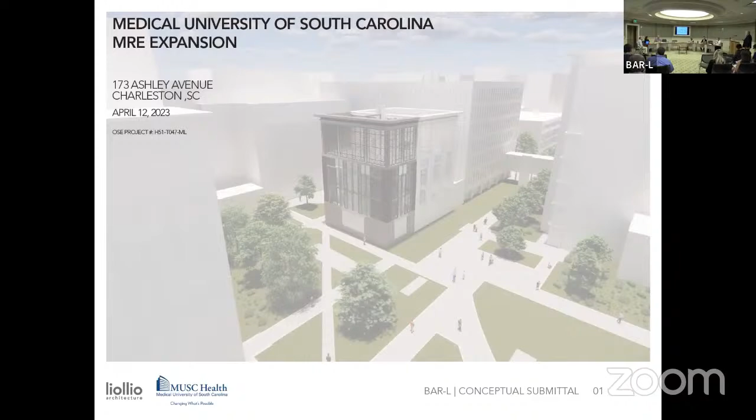It houses chillers that supply chilled water and steam for several buildings in this quadrant of campus, and it's being expanded to accommodate 2 new buildings, one of which we've already reviewed and approved at the conceptual level. The next one you'll see in just a moment.

I will move quickly through this. While I'm flipping through, I'll note that the building in question is here, this is Bee Street, this is President Street. The College of Health Professions building that was recently approved is right here; the next agenda item is this thing.

It is not actually a black building. Talking about this little wood frame piece right here on the model, tucked back into the core of the block, this site is part of the original footprint of the Porter Military Academy. We always include these same boards and timelines to give some sense of the history of the site, because we feel that's never not important.

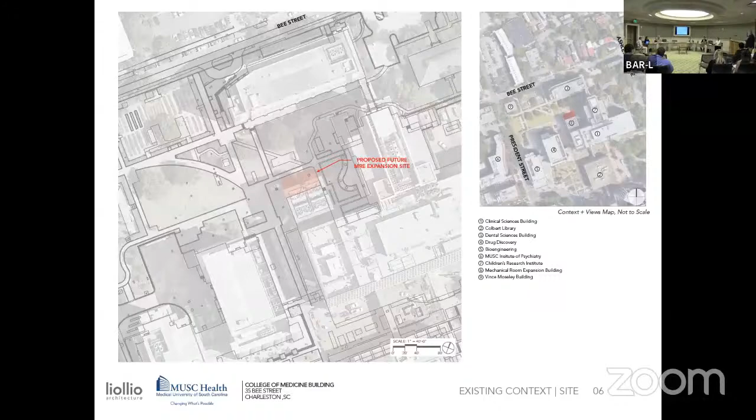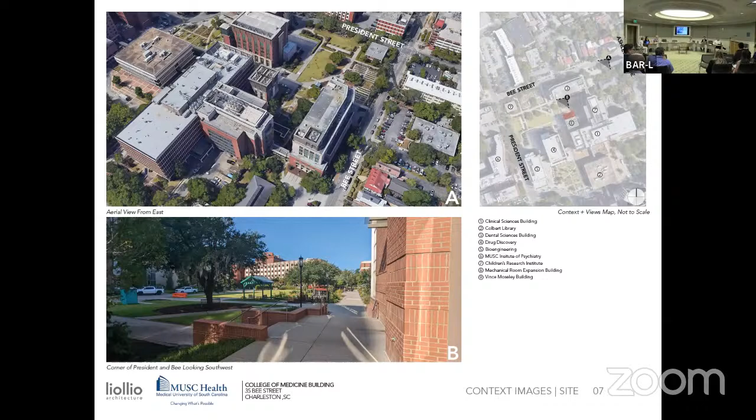This building right now is sitting in the middle of 20th and 21st century redevelopment of the block to suit the needs of the Medical University campus. See the building tucked in right here. At present, it's already fully behind the dental sciences building on Bee Street here, and compositionally, materially, it's a beautiful building.

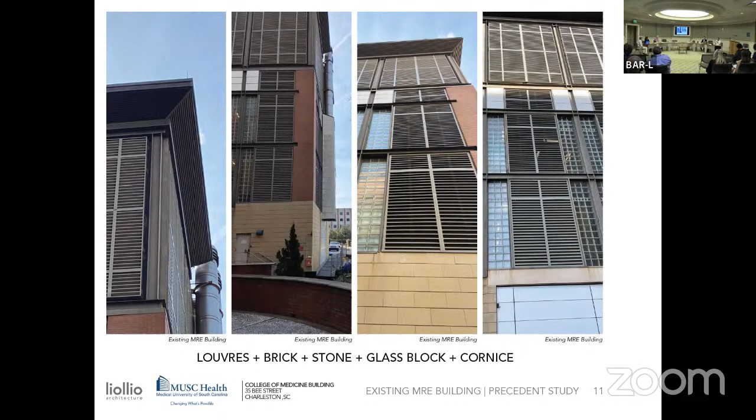I was very proud of it. The project architect who worked on it is actually now an MUSC employee, and he was very interested in what we're doing. And for good reason—the material palette, the facades, it works pragmatically, it works architecturally, and our intention is to simply expand that language.

We're dealing with a building that's not really historic by any measure, but it is valuable in our view. If you break down the materials and patterns, this is the composition you get, and we're just going to mirror that over and create one more bay. There'll be some form of architectural joint between the two, because we're actually building a new building.

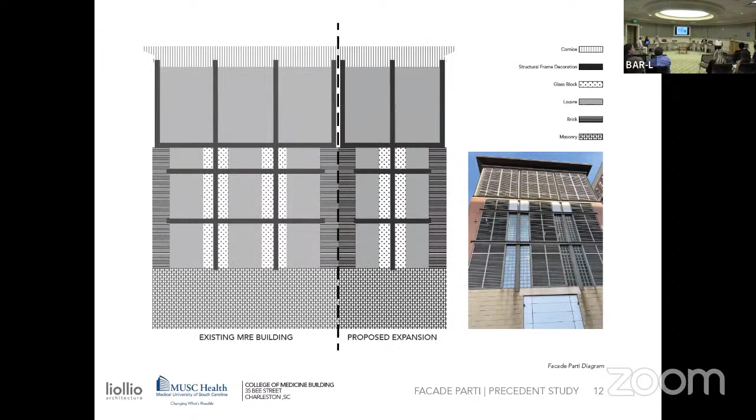We'll have to detail that. I'm sure there's a staff comment in that regard. We're extending its footprint by about 30.

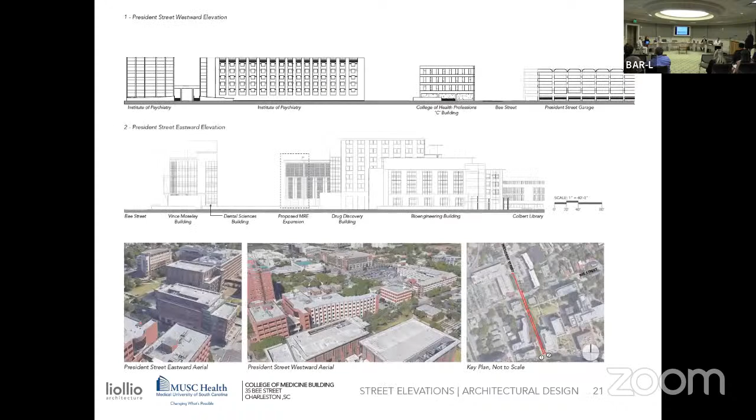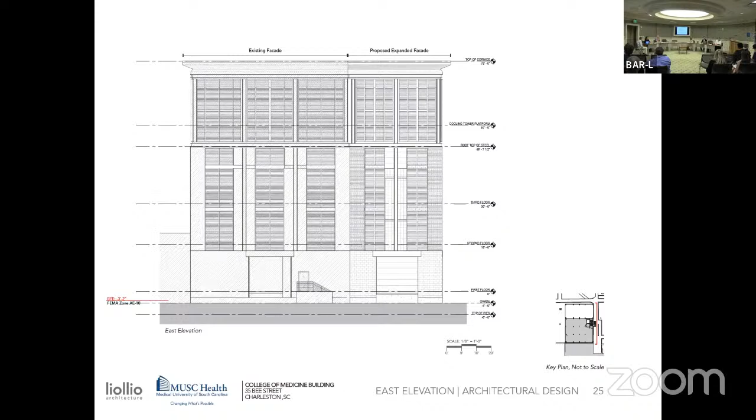Here you can see the existing on the left, the new on the right, in elevation. This is an expression of the material palette that's expected.

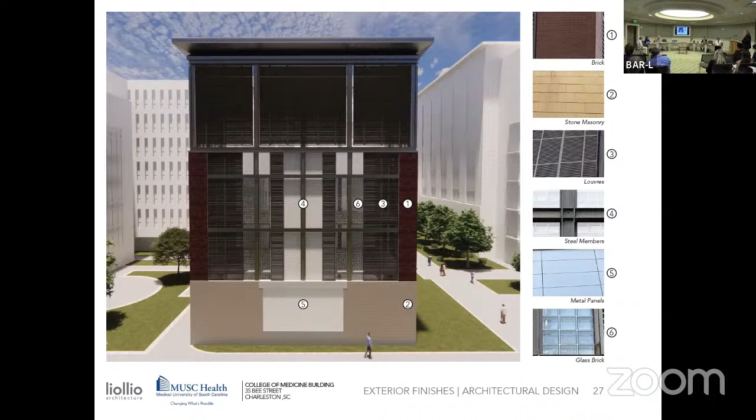We're going to have to fully clean the existing building. It's 20 years old, so it's got some fading and chalking, and we're probably going to match the colors as they exist today, not what was there when it was built, because otherwise it's going to get really mismatched.

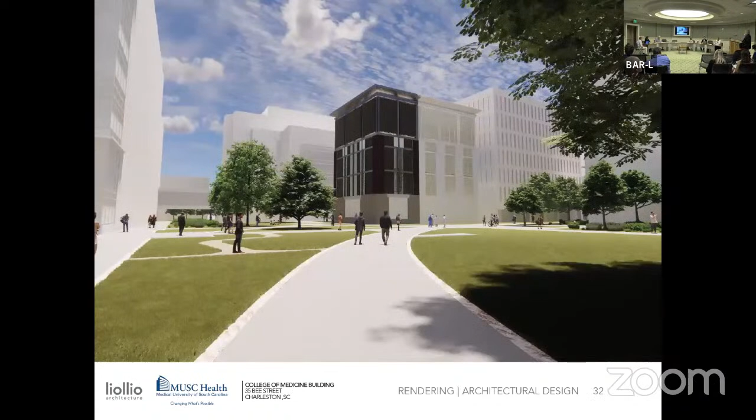And that's it, I'll answer any questions you have. Is there any question, Eddie?

So Jay, are all the materials you're proposing pretty much the same as what's there now? Just yeah.

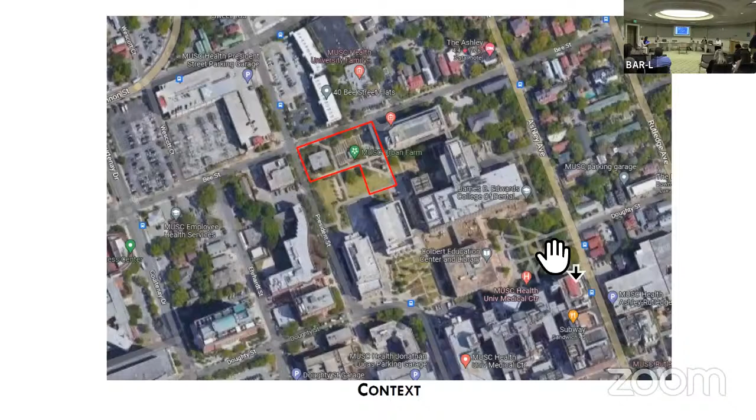It will include office and support spaces. And with context, this is in the same block up on Bee Street, with this one in the northwest corner of that block. This is the actual location. This is the building that was approved for demolition 3 weeks ago, and this is the historic wall that will be part of the next application.

Great, thank you all. Jay White again with Liollio Architecture. I'll start by acknowledging that this is the first permanent home for MUSC's college. I've heard it said that y'all had a building before, but I don't believe it—this is the first one, at least within any living memory.

But in order to understand the importance of this building to the university, we have several people from the university here—they're not going to say a word. We've got David in charge, who's the chief facilities officer, Jennifer Knoll, who's the assistant dean and chief of staff for the college of medicine, and Jan Buffington, who we call the space czar—she's the director of academic space utilization at the college.

Also here, Will Skelton from SLAM Collaborative out of Atlanta. We've been working together as a big group, and Mason and Dan are here, Liollio and a bunch of folks we've been teaching this semester, along with Eddie. You've been teaching Eddie too, though? I can't teach Eddie.

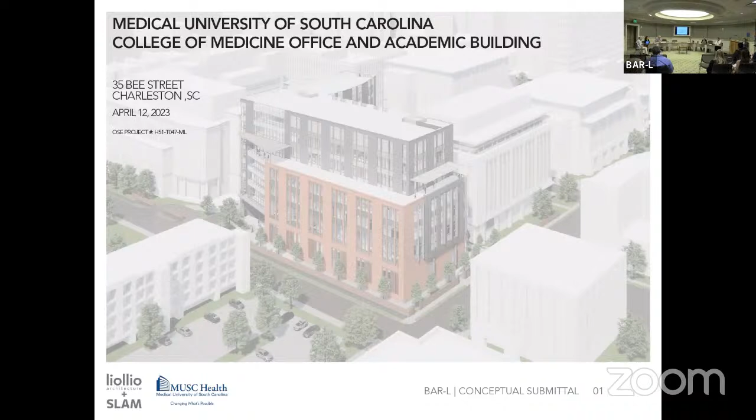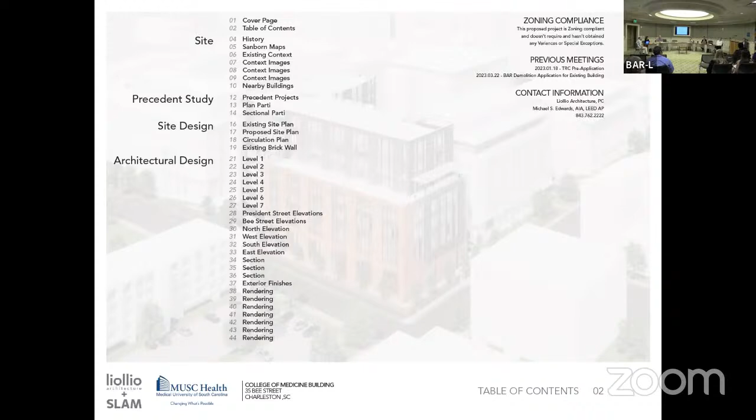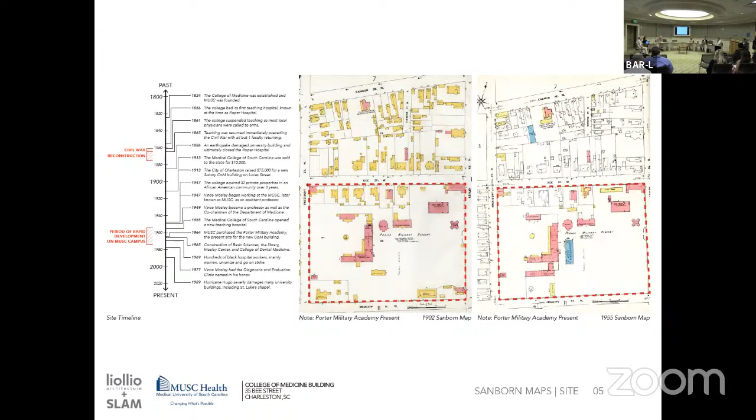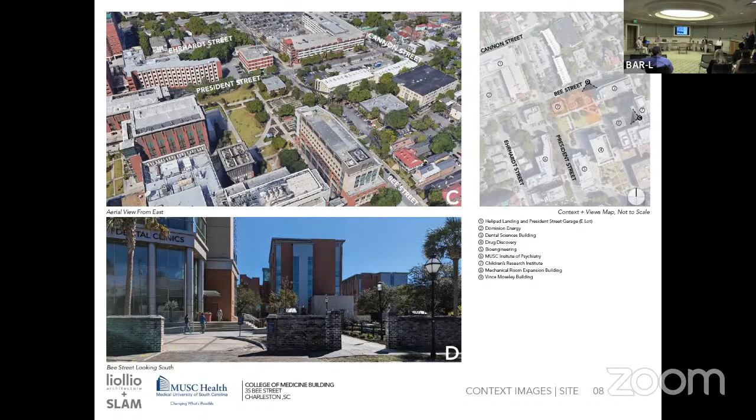You're all familiar with the campus, so I'll move through those other images. But in terms of precedents, there are two things we wanted to talk about. One is the College of Charleston Science Center, which we did about 20 years ago. We understand there's a special need to be conscientious when you're building the edge.

This is a very mixed portion of the city. There's a lot of scales, a lot of diffusion to the urban grid, and we're dealing with that. There's also a desire to express the importance of the program that happens here, like we did at Bassett Hall. And in a modern academic setting, there's an expression of making it inviting, active, and daylit, which you'll see in the design. Then there's embedding it within a natural setting, like SLAM did at a little school in Texas.

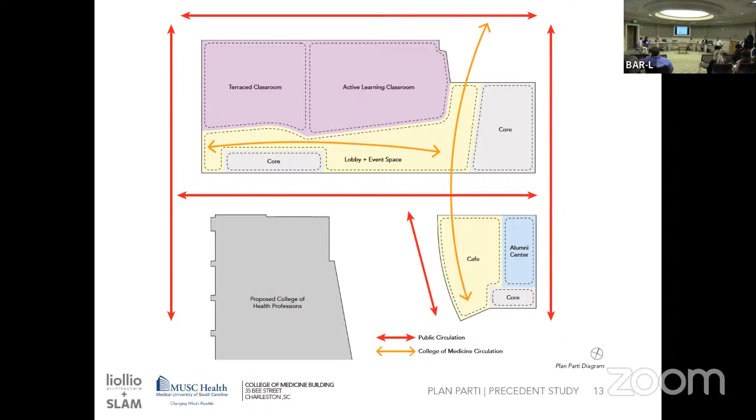This is the program on the first floor. Most of this building is an even mix between academic spaces at all scales and office spaces, which made it really challenging over the months we've worked on it to compose facades that suit all of those local programs. These red arrows relate to the site, but this section is diagrammatic and is intended to show how all these different uses stack up, because it makes a difference to the architecture.

The first two floors of this building have very tall floor heights, which is important to note. First floor to second floor is 24 feet floor-to-floor, because the large spaces on the first floor need that ceiling height for volume and for appropriate sightlines within the academic setting. The second floor is another 20 feet, then we settle into something more typical as we get into smaller educational spaces and the workplace. All the mechanical equipment is located on the seventh floor, within a mechanical zone occupying about half of that floor.

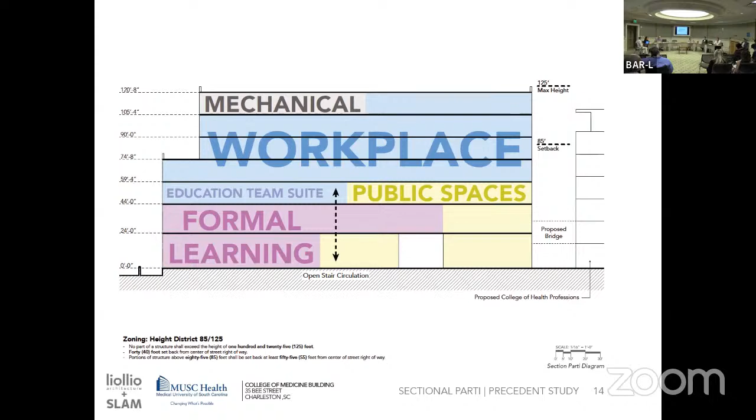Getting into the site plan a little bit: orientation across the top of the screen is Bee Street, and down the left-hand margin is President Street. We have the Vince Moseley building, not long for this world, the urban farm here, the future site of the College of Health Professions here, and then these three trees, which are notable within the landscape of the urban farm.

Since MUSC considers itself labeled as the Arboretum, we're going to spade out these trees and relocate them. The new 28-inch oak moves to the front entry, the 25-inch oak moves to this corner, and there's a 24.5-inch oak right there.

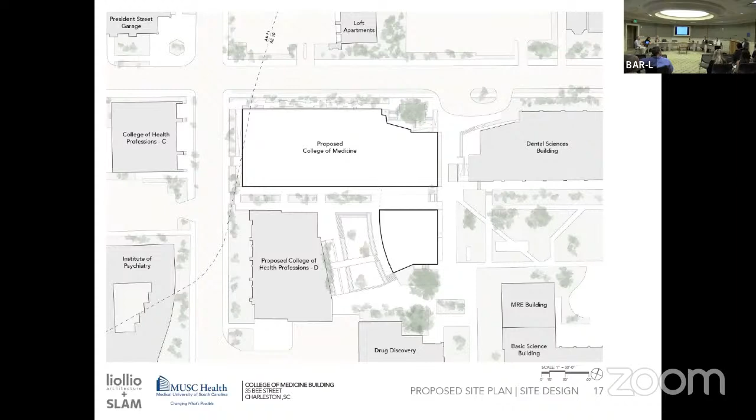This is the footprint of the proposed College of Medicine. This represents a breezeway at the ground level. There's a tangle of underground utilities on this site, but that's not really what dominated the site planning concept. We really wanted to focus on proper engagement of the streets and the appropriate creation of the courtyard between our building and the adjacent one.

One of the most successful attributes of the site plan is that it preserves and enhances all the pedestrian circulation paths that exist within the site today. There's a strong flow of pedestrians from the President Street Garage down diagonally and then southward through this mall. There's a strong east-west flow preserved and even enhanced. More pragmatically, there are fire lanes that have to be developed here and here, which have an impact on the architecture of large high-rise buildings.

See, the trees have been relocated.

Another thing worth pointing out is that we're dealing with a lot of issues with topography and flood. This is not a flat site; it actually has quite a lot of topography. Our buildings are sitting at a design flood elevation of about 15, whereas the rest of the site is around 10. That means our design flood, our first floor elevation for this building, and consequently for this one too, is right about the top of that wall, that historic wall that was originally part of Porter Military Academy.

So we're having to deal with how to enhance the space between the building and the wall, which brings in the whole site, and then also what to do with the wall itself. I'll show you another drawing in a minute.

We're making modifications to widen the wall to accommodate fire trucks here, create new entrances for handicapped access here, create new entrances for a stairway here, but then also using the surplus bricks to repair the wall and close in some of the openings that are no longer necessary.

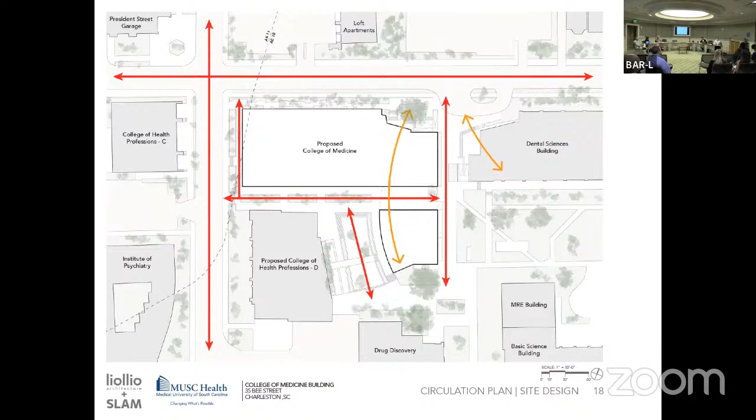As you can see here, this is the existing B Street facade. We're removing masonry here and here for that fire truck access. We're putting it back here and here, where Vince Moseley had poked holes that are no longer needed. Then on President Street, creating new entrances here, here, and here, with pilasters at a lot of the new entrances. That's because this is only a double wythe wall and it really needs to anchor any openings.

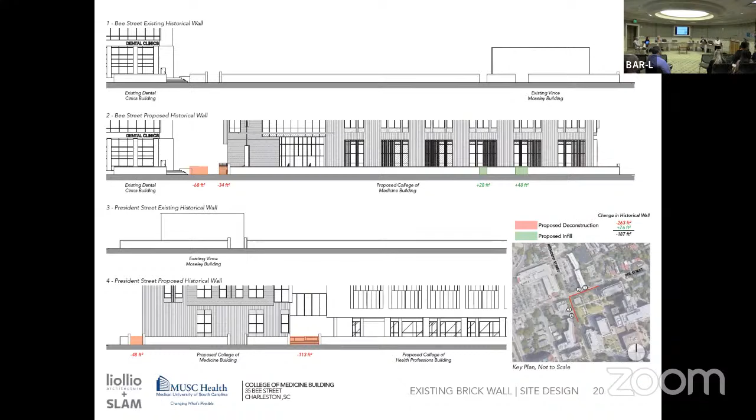Here, we'll let Ali take over and talk about the building.

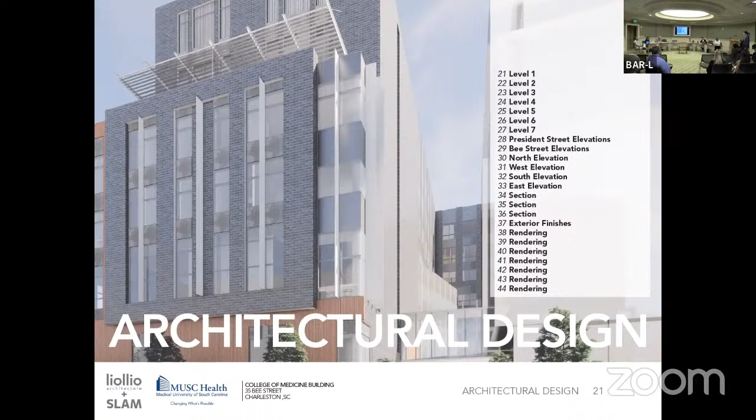I'm Will Stelton with SLAM. We're pleased to be working with Jay and Michael and the rest of the building team on this prestigious job for the College of Medicine. We're going to walk you through the architectural design. Feel free to stop me at any time.

As Jay mentioned, on the first floor there are some very large scale, large format active learning spaces. Specifically this space you see upper center, but also a tiered TBL, team-based learning lecture hall, which will step down. One of the things we're really excited about is the cafe space, which will be out here and will be a shared amenity among all the buildings in the area, and health professions are excited about sharing in that as well. And then the main diagonal that sweeps through the building, the circulation you see in yellow there, really starts to collect and sort of celebrate what is a more ceremonial entrance at the northeast corner.

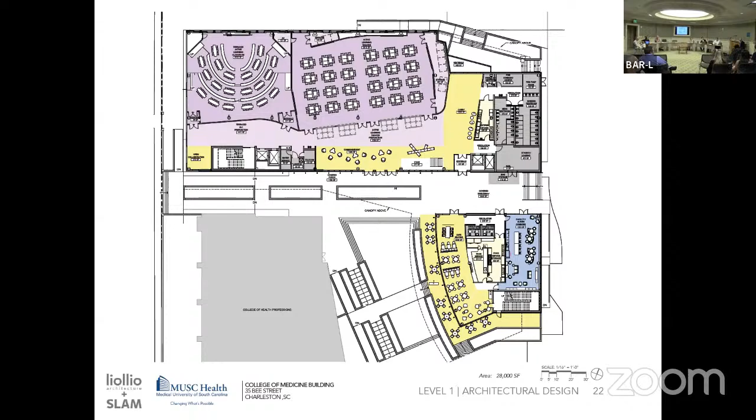But there really are a lot of different ways folks will approach this building, and we're trying to allow that to happen with multiple entry points from different directions, welcoming them into the building.

Quickly through the floor plans: the second floor is more active learning space, one major space here with an upper partition that will allow that space to have some flexibility. An open stair for three floors will start to allow the public deeper up into the building.

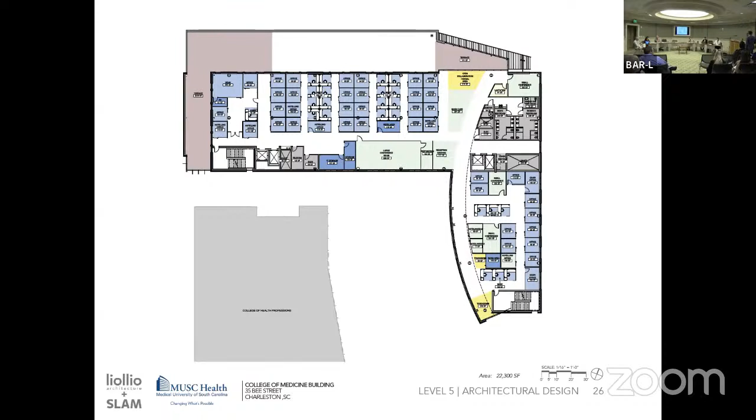And then you start to see there are more specialized spaces for the College of Medicine as we work our way up. More student focus on the third floor, and then more faculty focus on floors above, with the dean on level 5 and the rest of the administration, and then more offices on 6 and 7. The floor plates are a little bit smaller as they step back, and then there's a mechanical penthouse on 7.

Here you start to see some of the context, but also the elevation along President Street, which I think is really important as you start to see how bioengineering, College of Health Professions, and College of Medicine work together. We started to repeat some of the materiality and definitely some of the fenestration of those buildings to create some cohesion along the street.

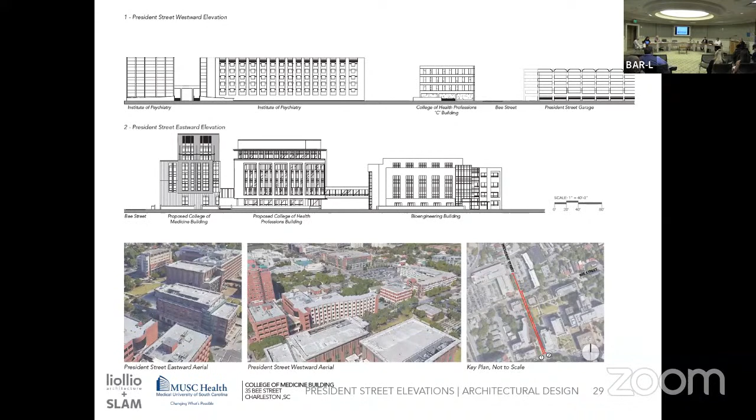But the college was also interested in making a bit of a statement and anchoring the corner of campus. So there's a little bit more of a sense of verticality at the end there that can really mark that corner as something special for the college.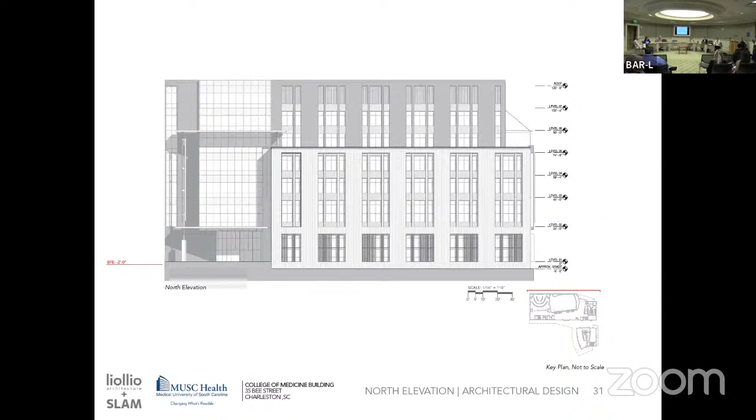You start to see the north elevation, and along Bee Street you see the verticality of those openings. This is that ceremonial entrance we talked about, which shares some commonalities with the dental building next door. You'll see that a lot more in three dimensions, and you can see it on the model as well, see which way the model is oriented.

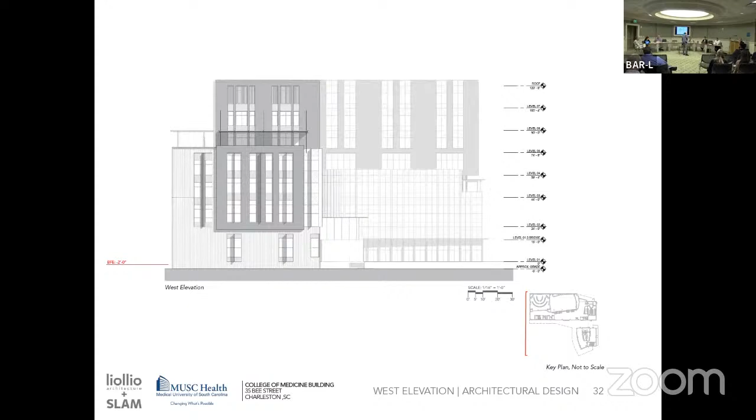You can see with this chamfered corner that dental has, that's been repeated in a way on our building. What we're trying to do there is create a gateway. We know that term is overused, but in this case it really makes sense for the university, with a main circulation path that ties to the main quad. There's also an idea that the university may want to do something with this property across the street eventually, and this would allow that to happen.

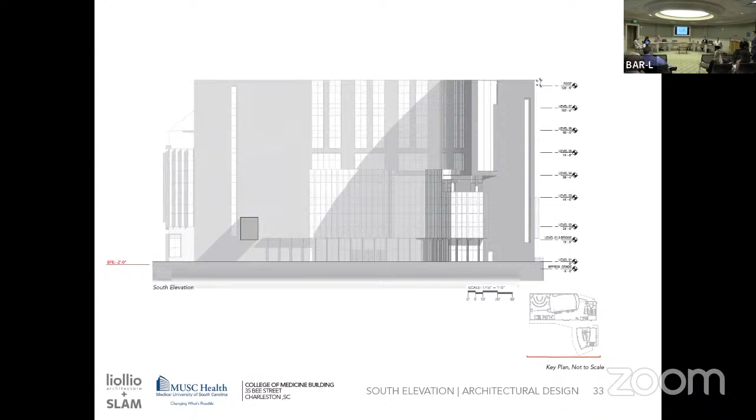As the building moves toward the inside of the courtyard, it opens up more and has a good bit more glass. This is that cafe we mentioned and some of the student spaces, looking out onto that shared courtyard with health professions. Not only looking out but looking in, we think it will be quite an active and spectacular space.

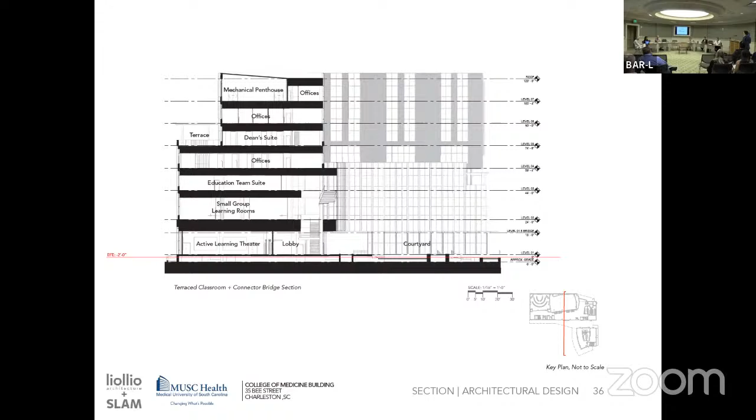Another version of the section to work up through the building. Cross section with the courtyard shown to the right beyond. Quite a few sections in there.

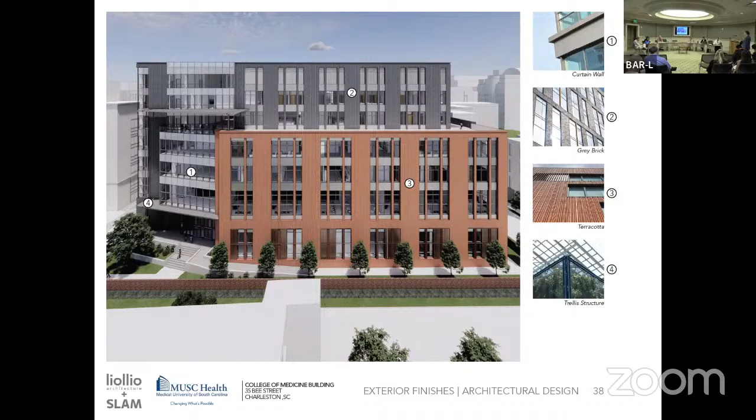Here you see the main corner, the northwest corner. President Street is here. This is the future health professions building, not built yet - the university doesn't own this. This is student housing and parking over here. That's why we felt like orienting our entrance here, with the common shared space and entry downhill, made a lot of sense.

You can see that the building does step back as it works its way up. We've got quite a few canopies and sunshades on the dean's level especially. The administration was really interested in having some space where they could gather outside, so you'll see several of those. We're also still working on the design of what the main canopy wants to be at this location. Jay mentioned our floor height - we need to get up about 5 feet from grade up to our entry, so we're working hard with our landscape architects to design that in a way that's very elegant and allows folks who are disabled to proceed up in a similar way.

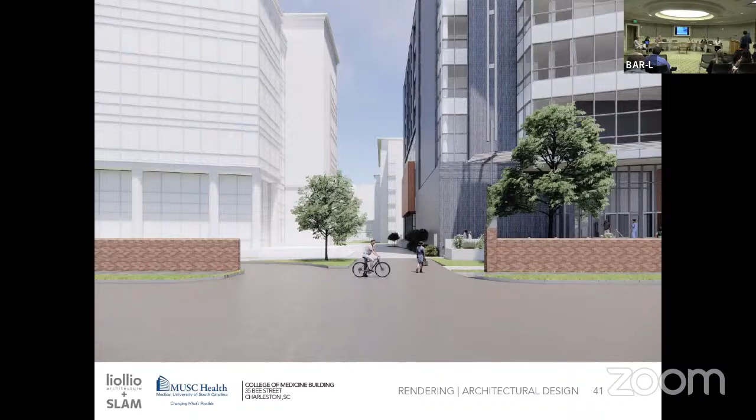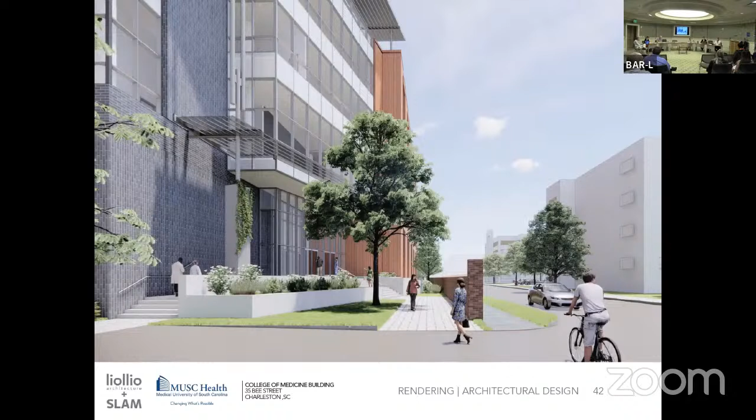This is a view down the corridor between the two buildings, looking south back to campus. This is where we're saving as much of this brick wall as we can, coming to this point, working on how to create that entry and get folks up both ramps and stairs to the main entry - that's what we're calling our ceremonial entry.

We felt like this was quite an important corner to solve as well. The health professions building, on the right, is vertically oriented - at least in their last go around they had some vertical sunshades, you can check in with them to see if that's still happening. We felt like having the vertical sunshades on our piece helped accentuate that verticality we talked about earlier. Because their building steps back a bit due to some electrical underground, we felt this corner was quite prominent and important, so we made it more like a lantern element that would light up nicely at night.

This is literally the Dean's Terrace up on the 5th floor, starting to accentuate that with both the brick and the canopy.

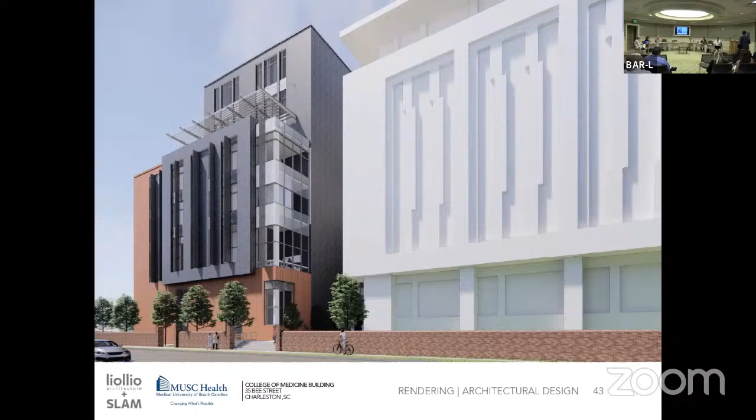This is between the two buildings, so we've got a pretty narrow passage through there and a bridge that connects the two buildings. We've spent a lot of time making sure folks are welcome coming in on grade, with a gentle slope up and turning the corner, with some targeted openings in the brick wall so people can get in from multiple directions. Once you make your way through there and underneath the connecting bridge, you kind of hit the oasis point between the buildings.

It will be a very urban condition. These buildings are 125 feet tall, and so for that reason we've started to step the building down in massing, not only on the exterior but on the interior, so that it feels a little more pedestrian friendly for the folks in this courtyard. This is the dining cafe space that spills out here as well as onto a covered connection that explores the eastern part of town.

Is there any public comment? All right, go ahead, there are staff comments.

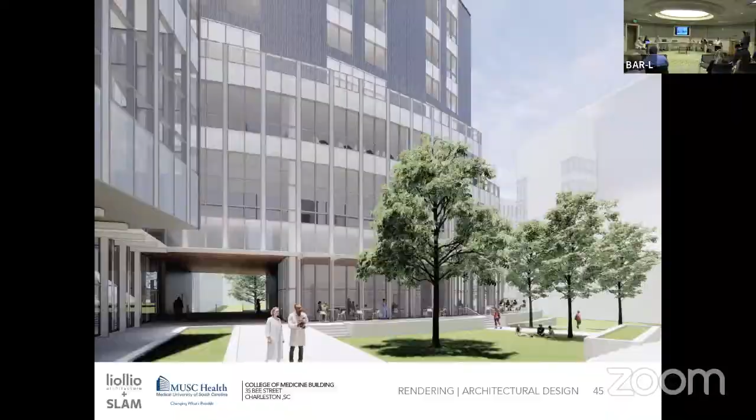Just a few notes, which I think have actually been emphasized in your presentation, but since it's a new project and a big project, I always like to have a few notes. First, the proposed is comparable to the neighboring dental school in height and mass. The proposed successfully blends the languages of the dental school and the new to-be-built College of Health Professions building on President Street, as well as the colors that have been part of the identity of the MUSC campus. A clear, easily identifiable entry gives hierarchy to the Bee Street facade and reflects, while not mimicking, its neighbor, positioned in such a way to properly serve as a gateway to campus. The facade openings give vertical proportions to the design as guided by the BAR principles.

The contemporary language of the building offers contrast to the historic masonry wall, allowing it to be showcased. Even so, alterations or disturbances to the wall shall be kept to a minimum as proposed. Applicant should describe how other non-original openings to the wall were handled - for example, does the pier design allude to original openings or to new openings? You did touch on that when talking about wall repairs.

Terracotta and brick are traditional materials; however, on this building they are placed and expressed in a very untraditional fashion. Because the building is clearly contemporary, staff is comfortable with their proposed use and orientation. It seeks to understand how these materials will wrap corners and edges and into openings. It's also important to understand the offset between wall planes and fenestration - for a building of this size, 8 inches seems like a minimum.

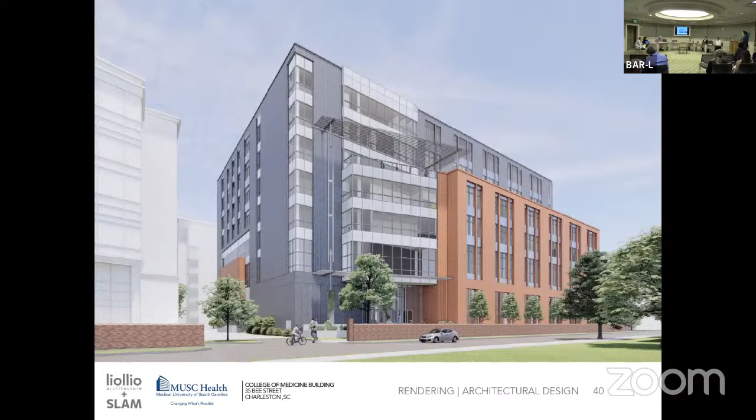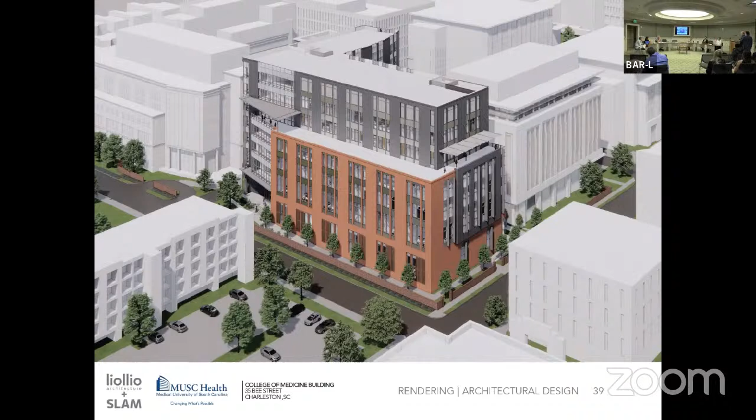Do we add the corner at the auditorium as well? Well, I don't know that I understood—can staff comment as well? Where was, I'm sorry, what was that? Yeah, I think it'd be worth studying. I think from the ground you'll feel much more of the relative position. Yeah, I agree. At the intersection—creating street intersections and hooking buildings, talking to each other, it's urbanistically important.

So part of our challenge is that corner we've been working hard on—this is where the terrace active learning theater is, the main one. We have projection screens or walls there, and they might not just be screens, they might be LED on a solid wall. We're trying not to put fake windows in. That's why we came up with this terracotta screen idea, letting natural light in where you can, since there are other means than glass.

So Annie and Linda, I'm allowing those to be covered under board comments. Okay, the motion is for conceptual approval of board and staff comments, including the additional height. Is there a second? Sadie, second. Eddie, how do you vote? Yea, in favor. Sadie, yea in favor. Luda? Yea in favor. Thank you.

Next one—is it made in house? Item number 5 is 35 and 37 Prioleau Street.

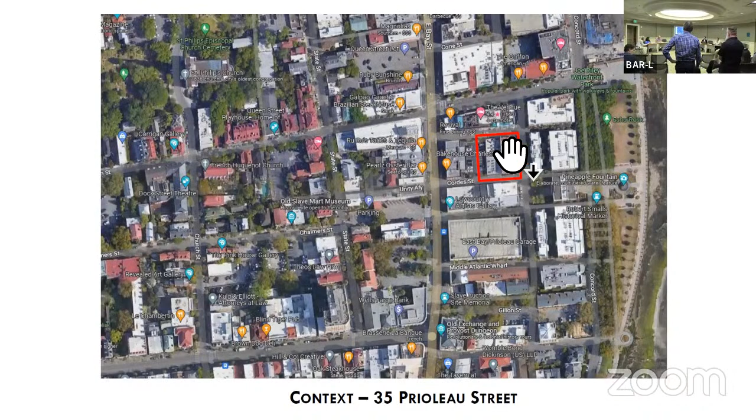The building in question is in the red box. It has 2 roofs, so you're seeing what looks like 2 parts of the building today. This is taken separately—fine, keep going. This is the 1-story structure at the back, on the south side. This is from the northeast corner. North elevation. West.

Okay, we're ready. Thank you, Chair. Good afternoon, I'm Jimmy Walker with Goodwin Mills and Cawood. And also we have here David Kreider with HPA, who is actually the applicant, an architect of record.

We've been working together on this building for quite some time, and fortunately we had a very good report on the history of this building, which when you look at the pictures, you can tell there's been a lot of different things going on with it over the years. I want to start with a bullet point overview from when the building began to where it is today, then David will go over the proposed design. This building—the front 3 floors—the whole building was a 3-story building in the beginning. The eastern side was a full 3-story building.

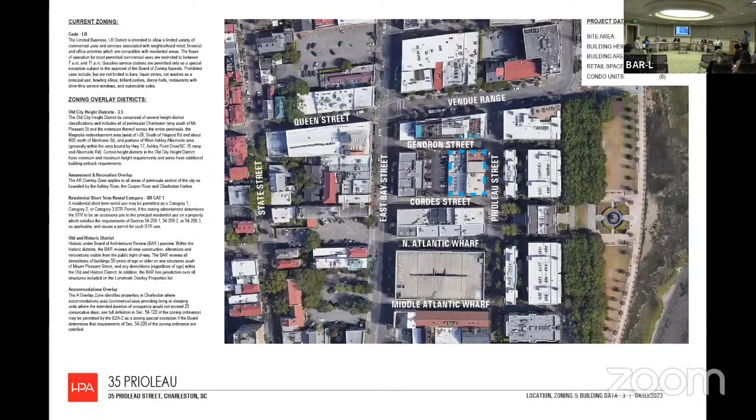It was constructed in 1820, and around 1833 the 1-story warehouse buildings were constructed on the west side of the property, along that parking lot between the buildings. In 1886, the great earthquake heavily damaged the building, as you can see top left. At that time it lost the walls on the south and east side—that's where the 3rd floor on the north side along Prioleau Street and the gable roof, half of the building, was lost and never built back. That's why you see the building in the condition it is now. The insurance maps all show that up until that point it was a 3-story building.

Also, apparently in 1952 there was a pretty big fire in the warehouse on the north side, the 1-story section. Notice half of that roof is sloped, half is flat—the flat portion was apparently destroyed by fire and replaced. In 1969, the rest of the original gable roof was removed; that was about the time the building was renovated into what was known as the Colony House. The north wall and third floor had to be reconstructed for structural reasons, so the roof came off and was never put back—that's when the full gable roof was lost. In 1994 the building, most of us know, became the Harbor Club, and the roof terrace structure was built around 2001. So that just shows the building's been through a lot of changes.

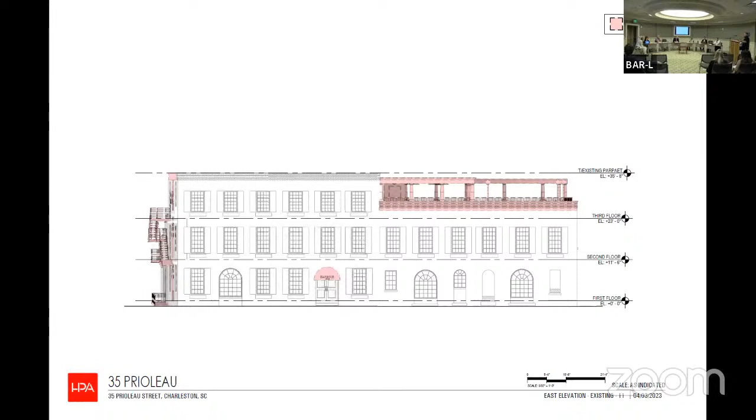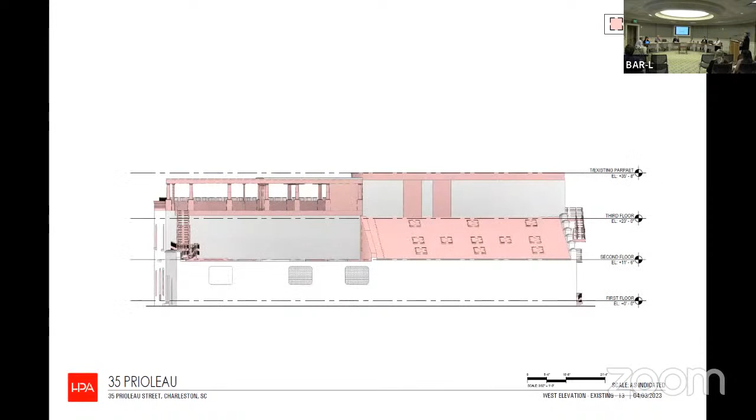This is the existing site plan. Going through the elevations quickly—essentially what you see in pink is what we'd like to remove from the building: the rebuilt terrace and the pergola, the canopy off the front entry, and the fire escape. We're going to put in some new windows, which you'll see in a minute, and the whole back half of that one-story addition is to come off as well.

So the plan is to turn this into first floor retail, and then upper floors condos, total of 8 condos on 3 floors. The gable form is what we took inspiration from, and we're proposing that a gable form would go back in its place—not a true reconstruction, but an adaptive reuse of the space.

We would like to also mimic that 3rd floor that you see in this portion here, back to what we assume or have worked out in our heads what it might have been like, or probably was like, before the earthquake.

And then we'd like to do an addition off the back that is inset from the existing 1-story construction, out of a material that is modern and differentiated from the existing masonry that you see there today.

You'll notice on this north facade, it's cleaned up. We're going to repair these, add a window at the corner because this top floor will be for condo usage. So to make a usable condo space, we need a window.

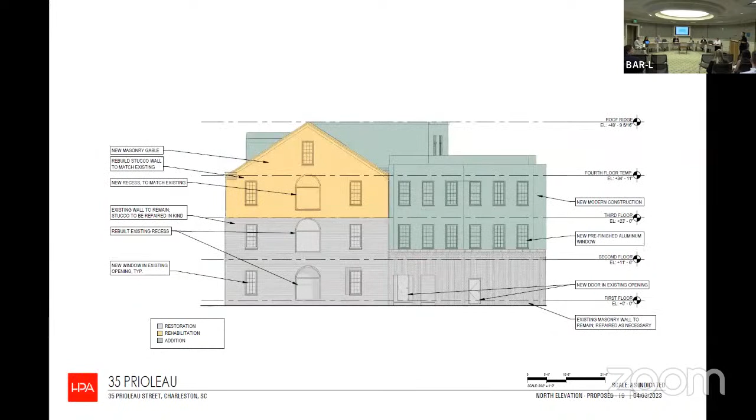The rear elevation is intended to be simple. We'll do some alignment of our new windows with the existing. We'll leave this back wall as it is, as we believe it was always that case. Again, modern materials on the back to differentiate from what you see that's there today.

And you'll notice that it will fit within the context, hopefully, of the space. Though it is larger, it was, as you saw in the historic photographs, a larger building to begin with.

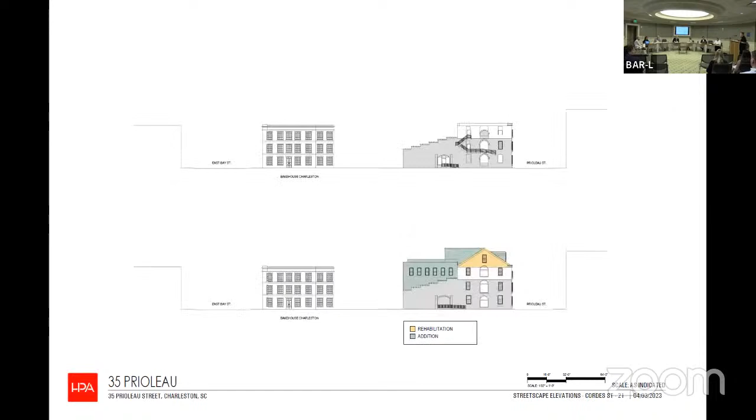That terrace, it hasn't been determined if it's just for the top condo folks or if it becomes an amenity for all the condos, but it will be a quiet terrace up on the top as an amenity to some of the residents.

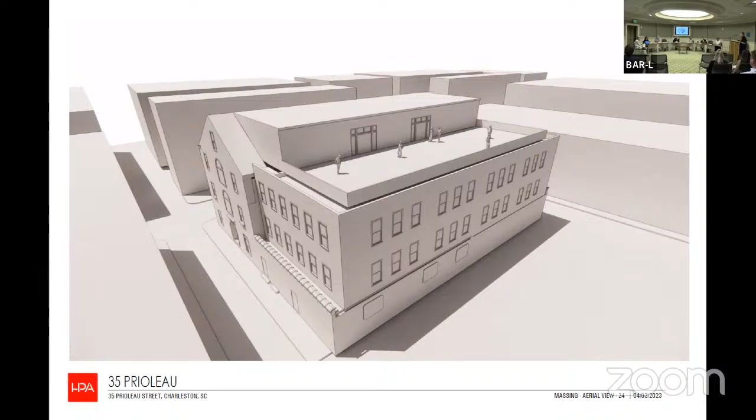Questions, comments?

So you don't know yet what those materials would be on the back? On the back, we haven't determined what the materials will be yet. We've been talking about a couple, but haven't settled on anything in particular.

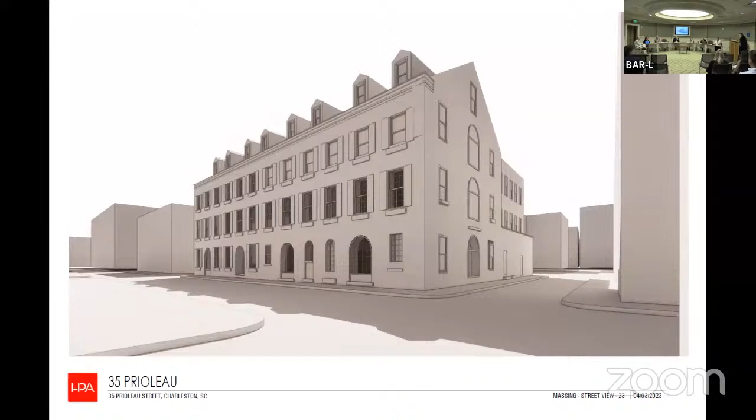So that entire—was that the west facade? We don't know what that material is. That's right. We've been mostly wrestling with form, and really that's presented here for discussion—the form of both this addition and the gable.

It will likely be unobtrusive visually. Well, that just affects the scale, so it's hard to know.

That's true. And then I was just curious, in the historic research, my guess is those windows aren't that old, but maybe they are. Do you know if that light count is what was original? Did the Preservation Society know that?

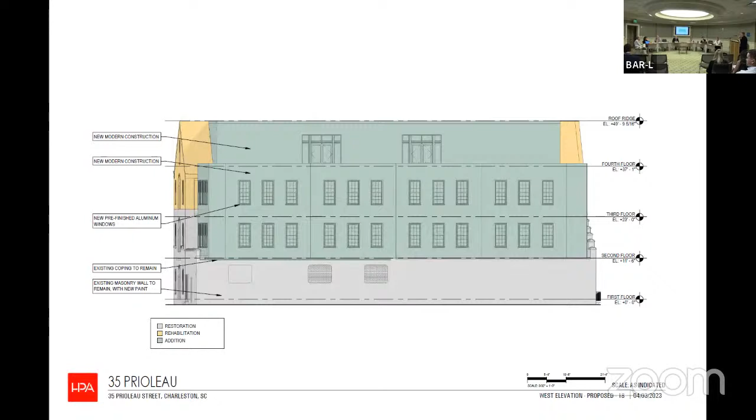Is it in the—are you talking about this addition or on the original? Just curious, because I'm assuming you're going to go back with new windows to match, since they're all in terrible shape. I was just wondering if they really were, whatever that is, 12 over 12. That seems odd.

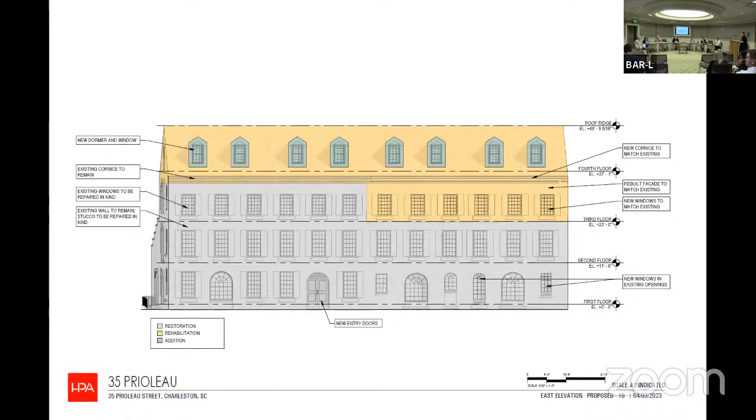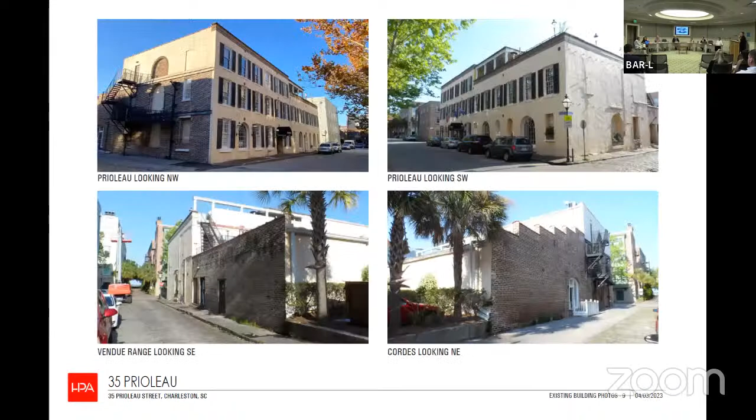There are historic photos for that—so there's a firewall that ran east-west that we found, and it appeared that the windows on the upper floors on the north side of that were of a different size than the ones on the south side, according to the research.

Any other questions? Is it time for public comment?

Preservation Society of Charleston—we appreciate the applicant reaching out to us on this project. We are glad to see new life brought back to this long vacant historic building, and supportive of efforts to rehabilitate the structure and address deferred maintenance issues. We also appreciate the historic research report that outlines the building's evolution over time.

However, we are concerned the plans appear to represent a reconstruction approach to reflect the building's pre-1886 condition. If this approach is to be taken, the Secretary of the Interior Standards for Reconstruction should be the benchmark reference, and currently we do not feel these are being met.

Specifically, these standards encourage reconstruction of non-surviving elements using physical and documentary evidence with minimal conjecture to enhance the public's understanding of the historical nature of the property. There is very little evidence of what the building looked like before the earthquake, but available historic photographs make it clear that features such as the dormers were not present. A much more detailed analysis should be done to show that the design is an authentic reconstruction without conjecture.

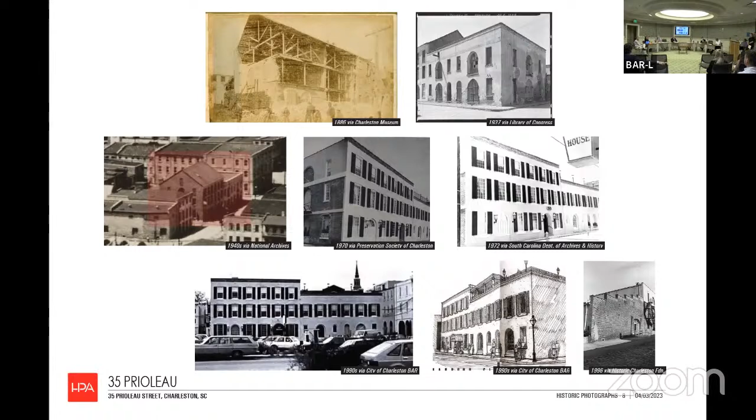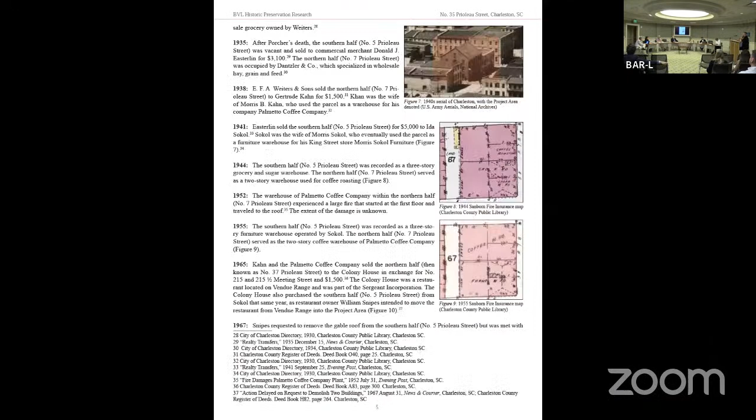Just a few notes. This was picked up in the timeline, but the major alterations occurred to this building in 1886 and 1969. The first was the loss of the third floor and adjoining gable roof on the northern half of the taller portion because of the 1886 earthquake. The second big change occurred in 1968 or 1969 when the gable over the third floor at the southern half of the taller structure was removed. This is believed to be due to a rebuild of the third floor for structural reasons and for, quote, a more pleasing arrangement from an architectural standpoint. The brick cornice, which appears at the roof lines above the second and third stories, may have been added at this time.

Staff comment: Proposed is an intensive expansion of a building which has a complex history. At this time, the application is utilizing both reconstruction and rehabilitation techniques, both of which are outlined in the Secretary of the Interior Standards as treatments for historic buildings. A reconstruction would be the seamless rebuilding of the third floor and gable roofs and could result in a cleaner composition. An adaptive reuse or rehabilitation can result in a more complex composition, but would preserve the history of the building. There are many elements within the proposed which we will look at individually before looking at the project as a whole. We'll break these down.

The third floor and adjoining gable at the north: the third floor at the northern half of the primary portion was lost in 1886, and the building's appearance has been without it for almost 140 years. Reconstruction of a third floor with gable would make this building appear as it did for some of Charleston's period of significance. However, for most of the lifetime of this building has been without the third floor at the north end, and a seamless reconstruction as proposed would eliminate a large part of the building's history. As part of a rehabilitation, a third floor which is subordinate and differentiated could be studied. This would preserve the cornice line which is visible on the existing.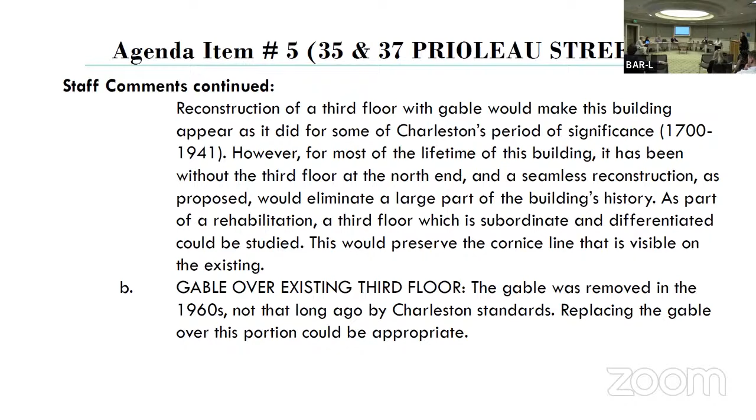The next element is the gable over the existing third floor. This gable was removed in the 1960s, not that long ago by Charleston standards. Replacing the gable over this portion could be appropriate. The next part is the two-story addition over the one-story warehouses. The warehouses were supporting structures for the main body, which is the taller portion facing Prioleau.

There is opportunity here to accommodate some infill density in an area that consists of 3- and 4-story buildings. An addition that is subordinate and sympathetic to the 2- and 3-story form could work. The architectural language needs to be revised to differentiate from the existing. Perhaps something lighter in perception could work.

The dormers facing Prioleau: as part of making the space in the gable roof form habitable, dormers could be added, as long as their language is designed to reflect the new addition. However, these would be considered new character-defining elements and would not be appropriate for a reconstruction, as there is no evidence that they ever existed.

The west dormer to the new roof deck. The size of the extended dormer at the west is overwhelming in size and needs to be reduced and minimized.

Fenestration at south and north elevations of existing. Restoring these facades to the previous appearance would provide interest and improvement. Because of the program, a rehabilitation is the right direction, and staff is supportive of an adaptive reuse that would allow the original forms to continue to be expressed. This would require the minimization of some areas and a creative differentiation of the new portions.

And we are recommending the deferral as proposed. There's a lot to think through, so.

Like to respond to the comments? Thank you very much. Any other questions for you?

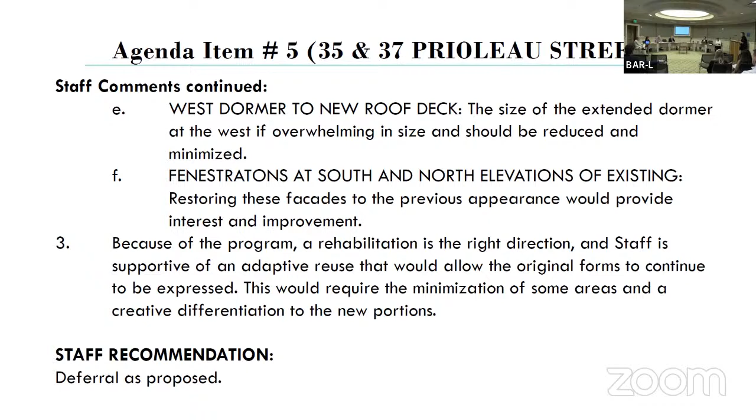Stephen has made a motion to defer with board and staff comments, and Jay seconded. Eddie, in favor? Yeah, in favor. Steve, in favor? Yeah, in favor. Rita, in favor? Yeah, in favor. I vote yea in favor also. Thanks, sir.

Number 6 is Iron Forge Alley, lots 13 and 14. The addresses are 22 and 24 Iron Forge Alley. This is new construction on the east side, Height District 2.5 to 3, and in the Old City District. The applicant is requesting preliminary approval for new construction of attached single-family residences.

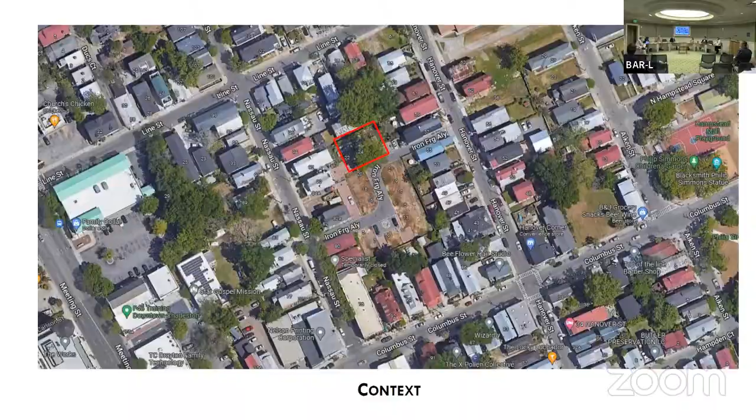Remember, Iron Forge is interior to the block. This is the plat showing the exact lots we'll be looking at. Some images from the surrounding streets.

Hi, my name is Luke Jarrett. I'm the architect of this project, Synchronicity. We are here this evening to request preliminary approval for the last two structures at this development. It's an attached residential structure on two lots, lot 13 and lot 14, at the extreme left of the site.

I'll back up a tiny bit. I don't know that everyone was here when we went through for conceptual. This structure is, as I mentioned, the last one on the site.

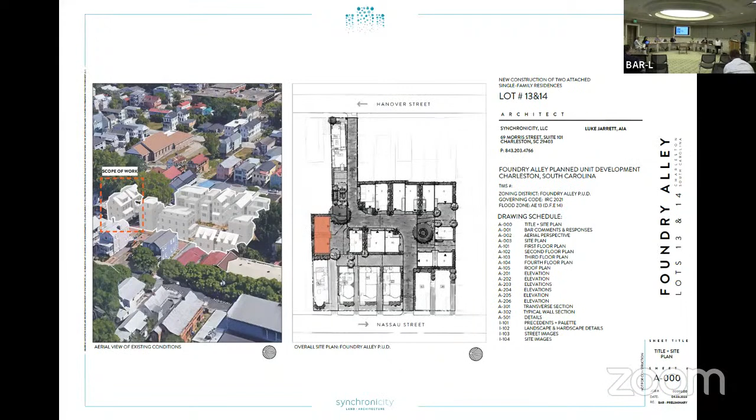This is new construction, infill, and there's also a building at lot 8 and 9, in the lower right-hand corner of the new development—right here—where this building is similar in some ways to that, and it kind of works on the edge of the development. The last time we were here in front of the board, we got a couple comments on the conceptual design, and the best way to do this would be to just bounce into the design and show how we respond to that.

Effective comments, and we appreciate them. Skipping to sheet 201, I believe we covered a lot of ground from that one.

Some of the comments had to do with the dormers on this building—a little bit of a technical concern between the top of our shed dormers and our main gable roof, and also a concern between the window sills in the dormer and the gable roof beneath.

As a response to that, in the proposed design here, you can see that we kind of have to go back to the other sheet—we weren't able to get them scaled on the same page. You could go to the next page. I'm sorry, you were on it already. That is what we had before.

So we have reoriented the dormers a little bit to give us enough room at the top of this ridge to have that connection work better, and we've raised the sills up so that we were able to get a little bit more of a good weather-type flashing condition on those windows.

Bulk of the other comments from the board had to do with the rear elevation, which is the north elevation. So if we could move through to sheet 206, let's start with the before from this time.

So this is the design that we had before. This building is really visible only above the second floor, which is the first conditioned floor from the right-of-way. But we did receive some comments from the board that this facade could be improved.

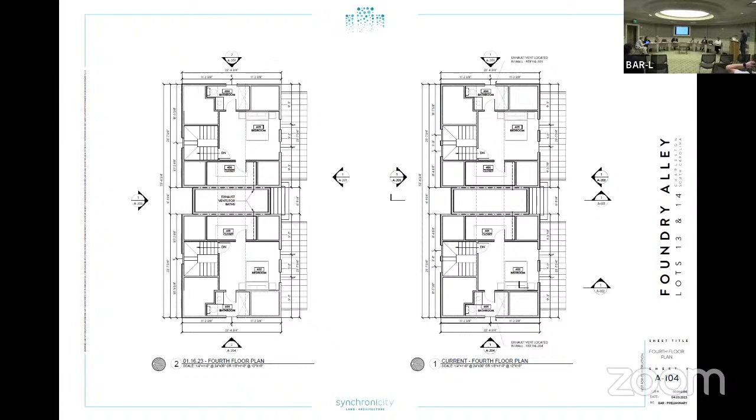But, what's our elevation sheet? Elevation should be 201. Yeah, so those top ones, I'm just asking about the dormers themselves, up here. What was it previously? The same, it's the same. He changed sort of how it's trimmed down and where the sill's at.

You answered my question. We could, I mean, that's all one single room, and we felt that reducing the window count there might be the right play, but of course we love the feedback. Well, I'll have a comment. I'll ask you to say something.

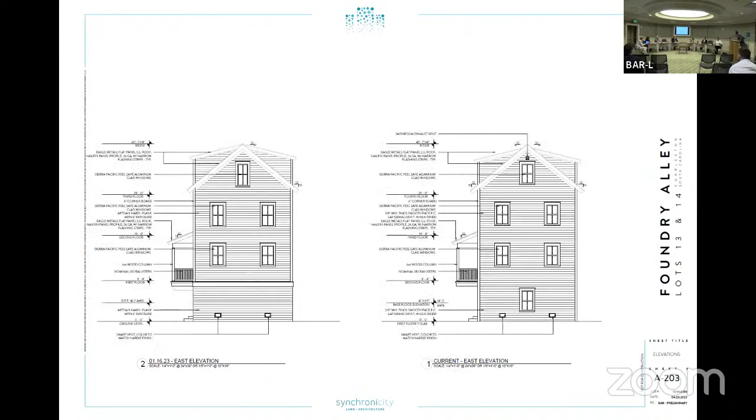Any other questions? That beam at the porches, go back to that one. The roof edge, it's very heavy, it's very unusual. I wasn't able to see the beam here, above the columns. That's huge, kind of an entablature almost. I was going to say the same thing. Look, if you go to your detail, if you just drop it.

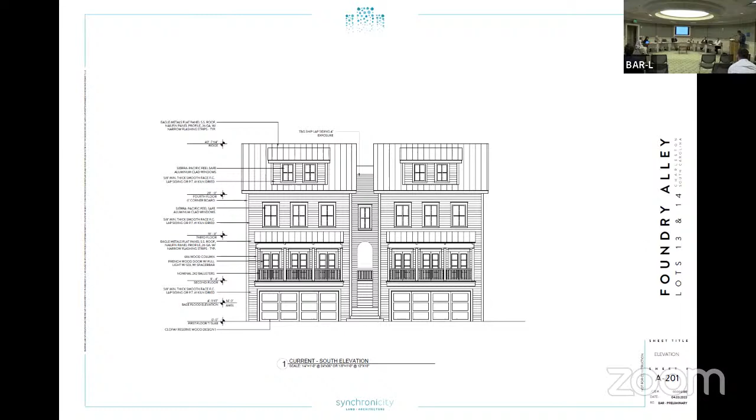Zero two. You've got away from the space, the porch, top of the capital, and you've got a beam, and you've got another frieze board or something that's like this big, and it could just be that big. It would look better. Let it bear.

Well, you know what my comment's gonna be. I've got my own problems, but dormers shouldn't have siding generally.

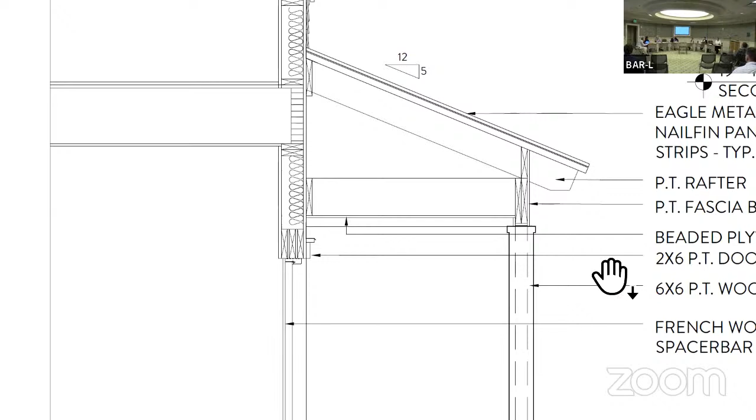Mr. Miller, I'm sorry, I'll touch on that. Oh, I'm sorry, let me touch on that. Okay, go ahead. Introduce staff, let me introduce that for you. Sorry, Luke, you're difficult to manage. I am too, you tell him over there. You should have him out for a night and close him. It's my fault, like you said, blame Luda. Yeah, all right, sorry Tori.

Just a few staff comments.

The water table and apron below at the first floor level has been removed. Aside from functional attributes, this is an important design element which helps to break up the larger flat planes. This is common to most residential architecture of this scale, and as it helps the building fit better into its context, it should be retained. The two windows on the larger dormers on the south elevation would benefit from a third to better fill the dormer, as was suggested and done with the smaller dormers on the north side.

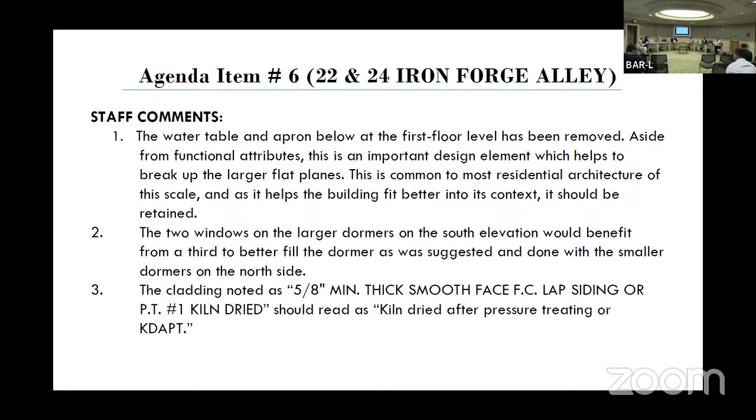Number 3, the cladding noted as 5/8 inch minimum, the note with kiln dried, should read as kiln dried after pressure treating, or KDAPT. Number 4, at the dormer on the north elevation, omit the narrow sliver of siding between the windows, pull the windows closer together, and use one shared 1x4 trim piece between them. The dormer should consist primarily of windows and trim pieces.

While the light size and proportion is consistent, we recommend a grid using one vertical and one horizontal on the square windows at the north elevation. However, we would also defer to how other windows of this size and proportion are handled on the other structures in the overall project. We're recommending final approval with board and staff comments, with final review by staff before permit drawings.

Oh, no, those are great comments. Thank you very much. So Eddie, please go ahead.

Okay, let's talk about dormers. I just have a pet peeve, but dormers generally don't have siding as a general rule. So either make the dormers smaller with 3 windows across and a little inset, or have 4 windows, whatever, but just trim it all out. I would vote for that.

But I did want to start by saying I think the design is very handsome, how everything's broken up. This is the first time I've seen it, and I think it's really well done. So these are sort of nitpicky detail things, but the other thing is the light cut of your French doors.

Those are almost horizontal, they're definitely square, whereas all your windows are vertical. So I would cut out some of those mullions so they'd be vertical, and then like Luda picked up on, I think just study how you're trimming out the porch, because in pure elevation it looks tall. It's going to look tall when you're standing there. I just think it'll work better with this little cantilever porch.

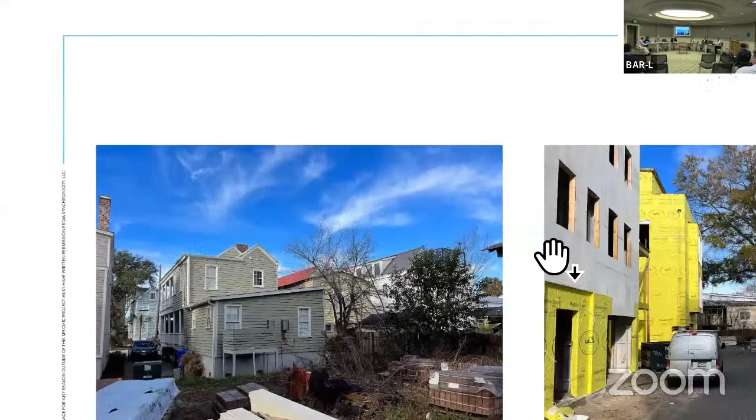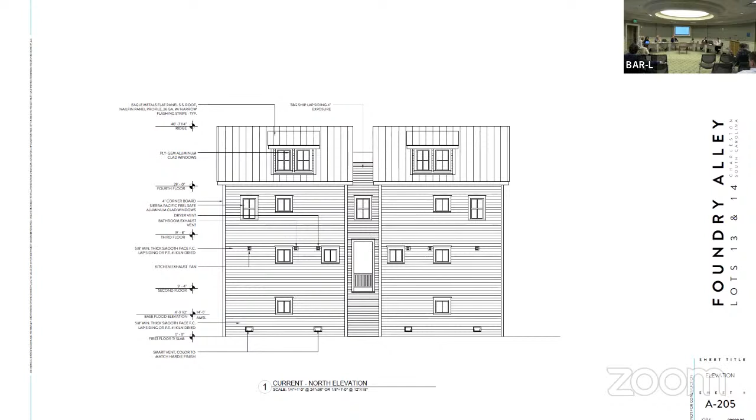Okay, so just one thing, sheet A205. You've got to have the vents, there's no question about it, but this seems difficult to flash. The ones that are immediately adjacent to that window trim would be really hard to install right there and make watertight, just hard to do.

Thank you, Dan. Yeah, appreciate it. Any further discussion, motion?

I'll make a motion for final approval with final details to staff, board and staff comments. I'll second that. Preliminary? Final. Oh, okay, yeah, final.

Eddie made a motion and Jay seconded it for final approval with final details for staff with board and staff comments. Eddie, in favor? Yeah, in favor. Any opposed? Yeah, in favor. Jay? Yeah, in favor. And I vote yeah, in favor.

Thanks so much, y'all, I really appreciate it. The last time you'll see us on this project. Jay, I believe you were there for the very first, that was a lot of comments. It's been nearly a decade.

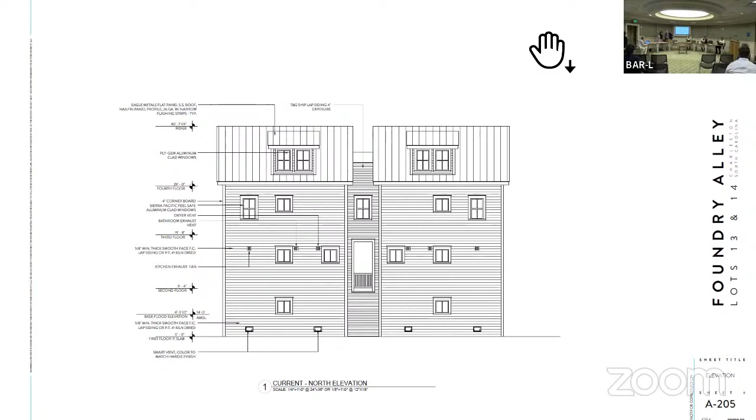Thank you so much, y'all have a great one. Thank you, Luke. I blame the chair for letting it get out of order. So do I. Good to see you. We shouldn't have had a big cup of coffee for him. Yeah, I am, I'm like, oh wow, 6 o'clock.